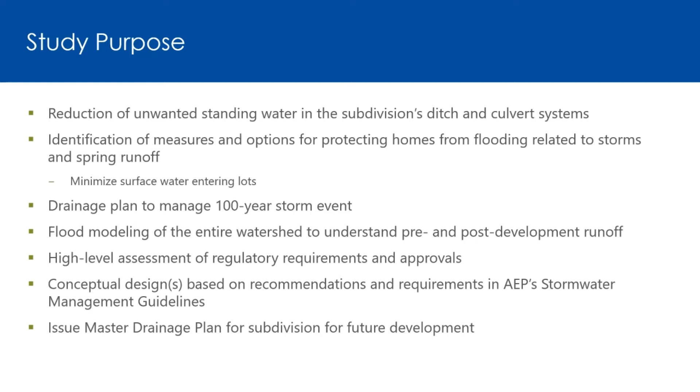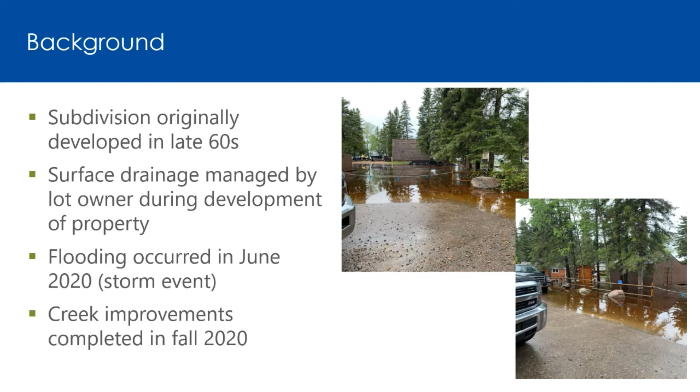As part of our work, we looked at the known historical issues. The MD had provided their historical records on file for us, which we reviewed, and we made contact with some of the landowners listed in those records.

We went out and did a field assessment and some surveying back in September. While there, we managed to talk to a few local landowners who happened to be around. Lastly, there are issues that have been identified by the MD through discussions with them and their historical knowledge of the area.

So just to touch a little on the known historical issues. As I mentioned, some of the driveways were installed by the owners themselves. A lot of the culverts were either undersized or there are no culverts at all, creating drainage issues out there. Majority of concerns are focused in the areas at the end of the cul-de-sac here on 2nd and 3rd Street.

Right along a point here is where we have a lot of grade relief where it gets down to the lake level, and that's contributing to the runoff coming down the roads and getting into these areas. The pictures reflect that as well. There are also known local flooding issues within some lots, associated with culverts that either don't drain properly or ditching that isn't adequate within the roadway.

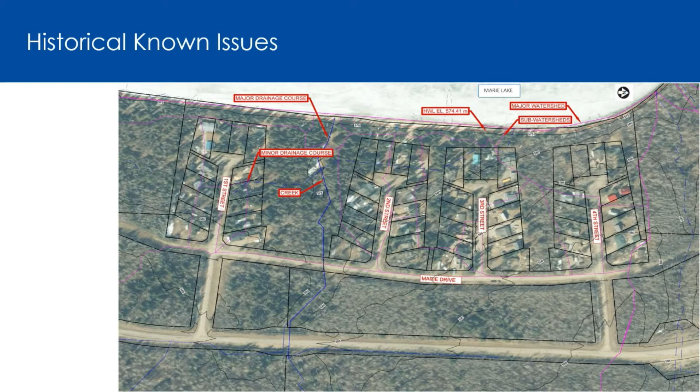So part of doing the review we did is we got some LiDAR information, based off satellite photography, as well as ground survey we performed while out there. What we ended up doing was modeling the area to see where we're getting issues, and how it related to discussions with local landowners and information provided by the MD. The key area to focus on is this red area, the outline of where the significant flooding is. There are issues within individual locations with respect to culverts and a little ditching, but this is the substantial drainage area that's been having the problems.

One key thing to note is this dashed blue line. This is a minor drainage course that runs between the creek over to the south side, and comes out towards the lake on the north side, more the west side I guess—actually north is off to the right side of the page. There's a low point right in this lot, and with respect to the drainage, the water does release to either the creek or the lake when it gets high enough, but it typically has to get around 1 to 2 feet in depth before it gets to that point, based on our modeling.

A couple other points to note: the culvert installed up here by the MD is adequate for the 100-year storm event, but it does hold up about 2 to 3 feet depth of water. So it does pass, but water will back up behind it. Overall, the grades in this area do not accommodate drainage out of here very freely, just due to it being such a low point.

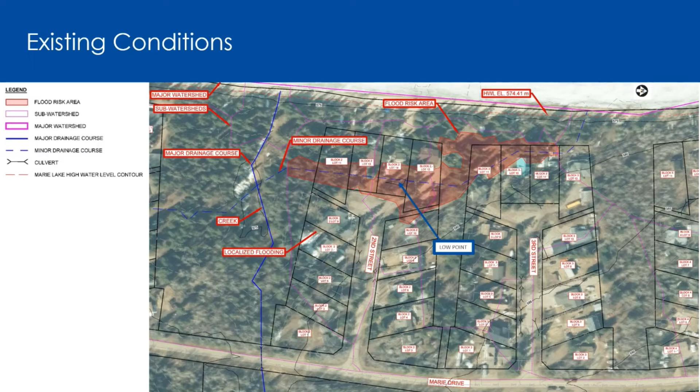So we're fairly confident that the information used for our study reflects the true conditions. The key flooding areas noted were along these properties at the bottom of the hill, where the water naturally wants to go. So what we wanted to do, as opposed to trying to direct water away to areas uphill, is work with gravity on this project, which we felt was the best way to go.

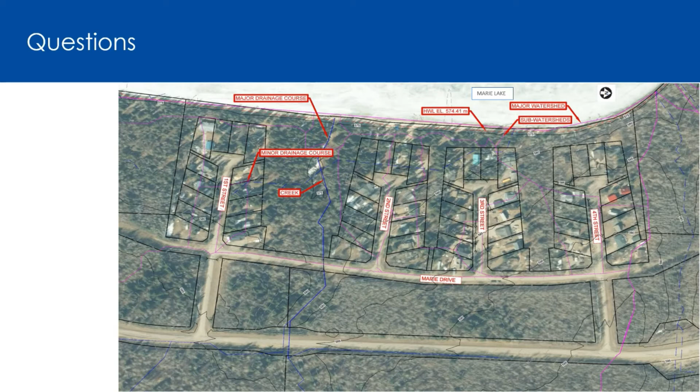Yeah, that's the intent - we're going to provide surface drainage along here, but the intent is that with people requiring access down to their boats, we'll design it to have some room in there so that they can still do that.

And as far as our existing culvert that we put in shortly after the flooding there, you're saying that is sufficient for the 100-year event, but could potentially back up water, and so could be upsized? Yeah, you're correct. From what we've done with our initial modeling, based on high level stuff - on detailed design the information might change slightly - but the idea right now is we'd have to go to an open ditch there, and it'd be quite a large culvert to accommodate the flows going through.

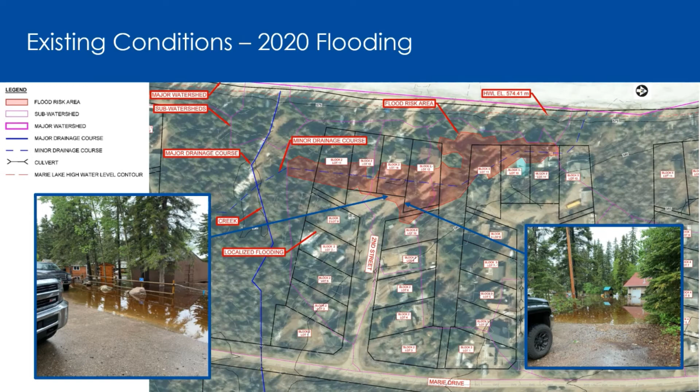I think from what we've been seeing, it'd be very difficult to do. The only thing we've had looked at is capturing what we can coming down off of the couple of top lots here, intercepting that and getting it across. So that's the one reduction we're doing.

But with the way the hill comes down here, there's going to be a percentage that's going to come down that we have to manage. So it's the portion up here that we're going to try and divert what we can to reduce what's coming down. But we're still expecting, based off the modeling, that we're going to get water coming down.

We did our modeling to represent diverting what we can to the east side of Marie Drive as well. So there's a percentage we can remove, but we don't believe we can remove enough to mitigate the drainage issues down here and eliminate this drainage on either side.

Another question: if we are against any of this work, what should we do? As residents, that's why we're doing this open house, to present the modeling and what our proposed solutions are to mitigate these issues.

If you are opposed to any of these, or have suggestions or comments, we'd be happy to discuss them with you and see how your comments align with the engineering, so maybe we can look at something a little different. But as it is right now, the modeling shows this is probably the best case solution. If there's something we're missing, we can definitely take that into consideration.